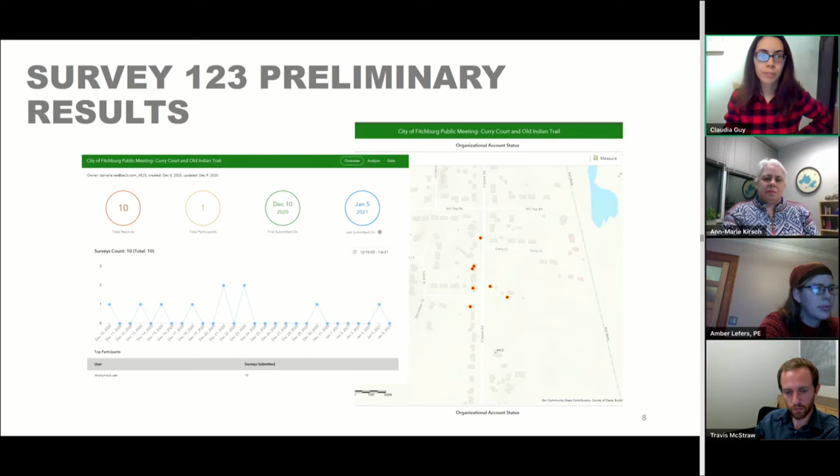So the project purpose and scope. As I'm sure everyone here is very well aware, the Curry Court and Old Indian Trail area has dealt with numerous stormwater issues for many years. And the purpose of this project is to assess the area shown below for potential stormwater improvements. So that area of interest outlined there is the scope of AE2S's study.

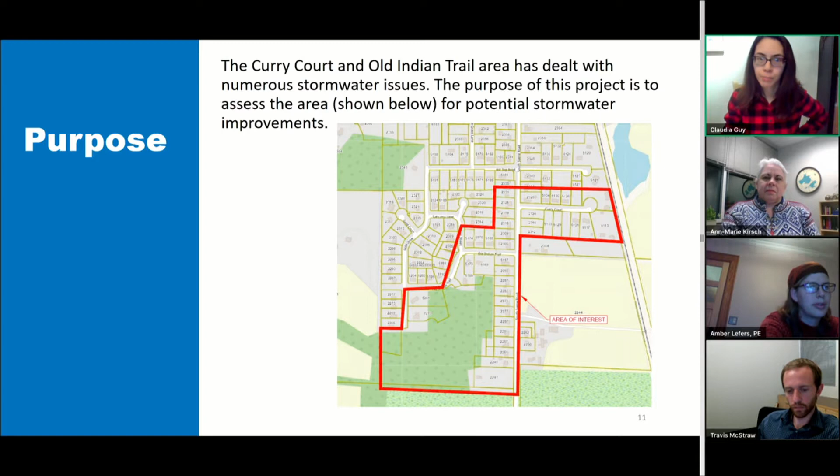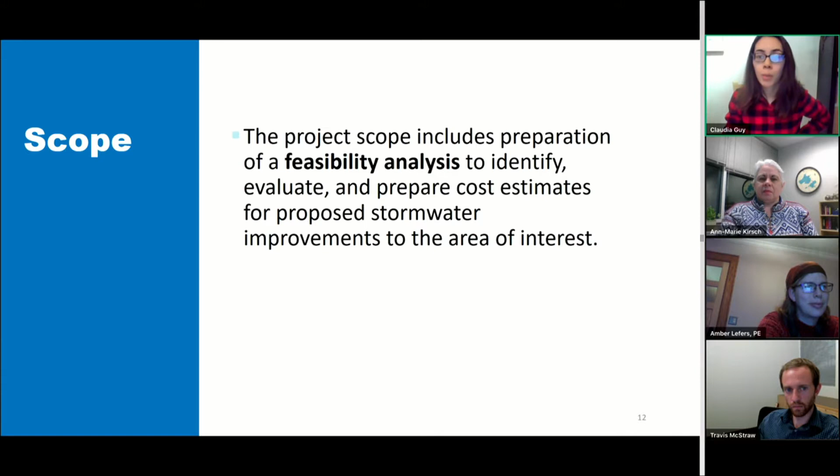More information about the scope. The project scope includes preparation of a feasibility analysis to identify, evaluate, and prepare cost estimates for proposed stormwater improvements to the area of interest. I did want to point out that the feasibility analysis is just that. It will be concept, solutions, and cost estimates. Actual preparation of construction plans for the selected alternative would be a separate project after this project is completed.

Going over some stormwater issues facing the neighborhood. One issue that we've seen and heard a lot of is slow moving water and stagnating water in ditches. This photo here is a photo of the culvert where it comes out on the south side of Old Indian Trail. As you can see, there's just a standing pool of water there, which doesn't drain, which means that water will pool there until it either infiltrates or evaporates, which means that water can stand there for very long periods of time.

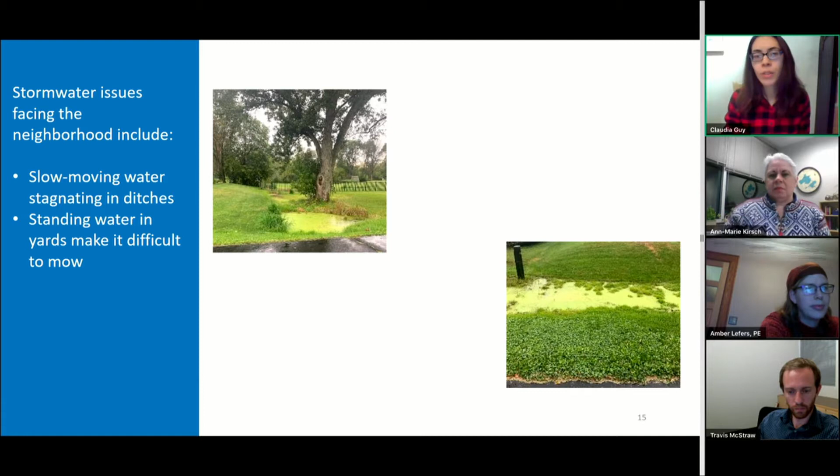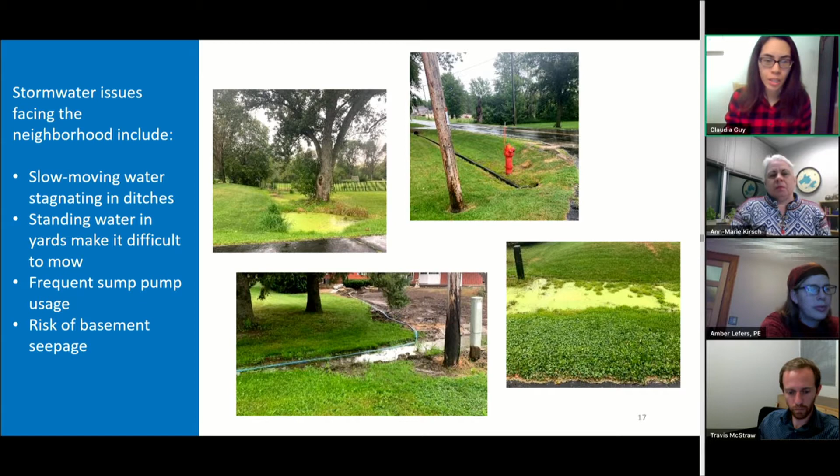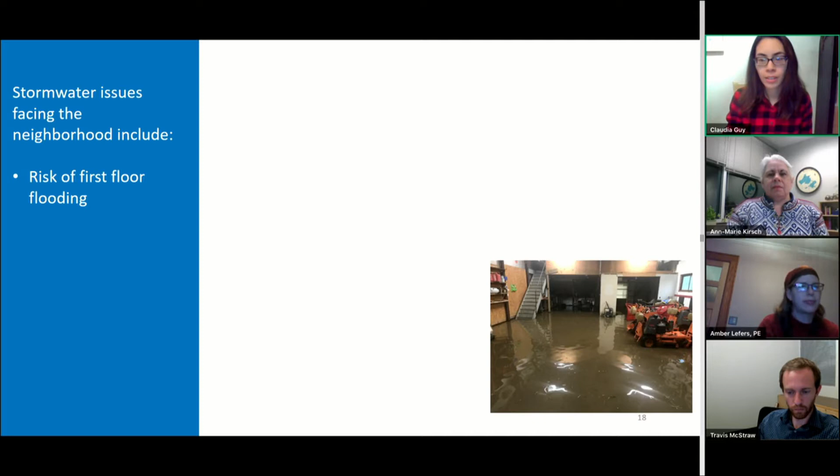Standing water in yards, which is both unsightly and makes it difficult to mow. Frequent sump pump usage, risk of basement seepage, groundwater getting into the basement, risk of first floor flooding. We have had reports of that happening to a few structures on Curry Court. This image here is a shed at the end of Curry Court, and you can see that there is water within that structure. Risk of basement flooding, and then also street flooding.

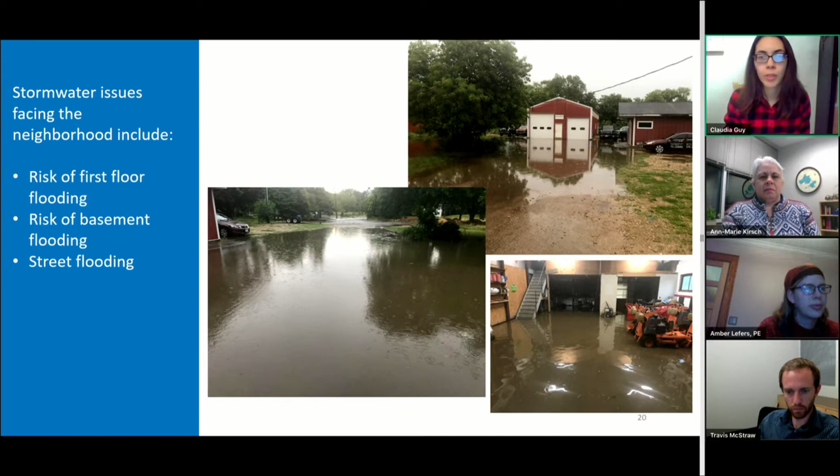Okay. Make sure I have my screen set up. Yep. Are we seeing the correct screen? Yep. Okay, perfect. Just wanted to check.

Okay, so talking about some of the existing drainage challenges. It kind of illustrates where the problems might be coming from and where we need to get to, and informs our decision-making process as we go through the alternatives analysis. So in general, this area, the Curry Court, South Syene Road, Old Indian Trail, has two general outflow locations. The light blue is showing the general watershed. That's about 64 acres that flows northwards to Swan Creek after it passes under the railroad.

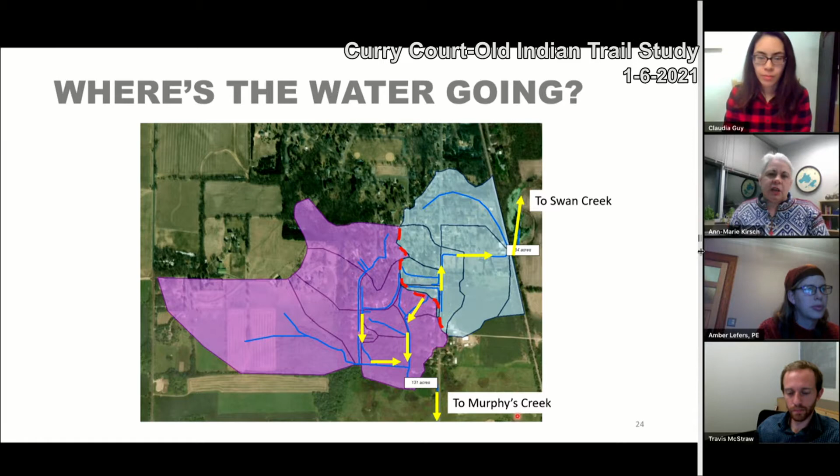In the magenta color on the left, this area eventually drains south through the Gold's Addition Park down south to Murphy's Creek, and then eventually flows east. Both Swan Creek and Murphy's Creek ultimately discharge into the West Waubesa wetlands and Lake Waubesa.

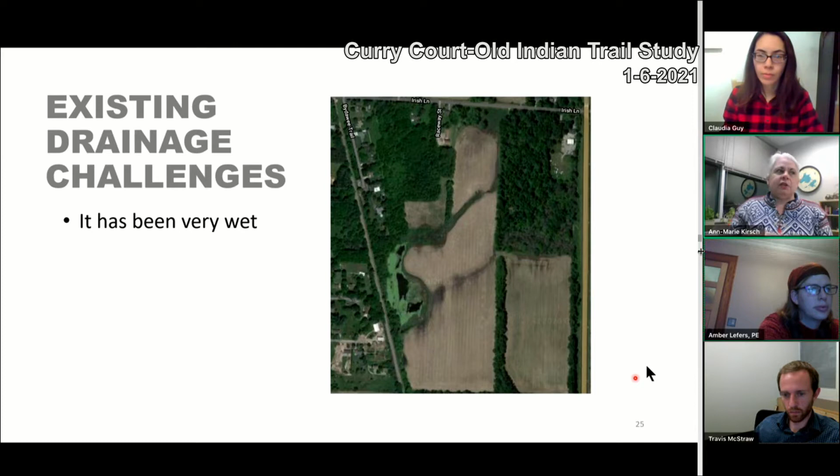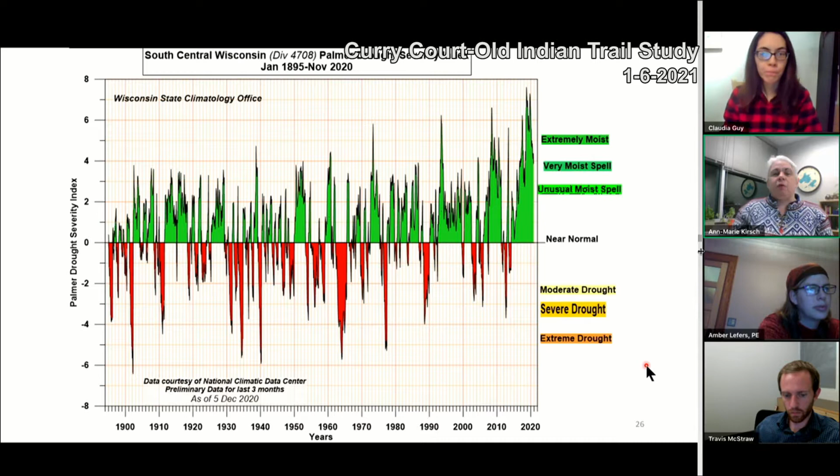Next, I'm going to show this graph. This shows generally over the last 100+ years, going back to 1895, whether South Central Wisconsin has been wet or dry. How far red goes shows how big the drought is, and how far green goes shows how relatively wet it is for that year.

Going through history, you see it bouncing back and forth, and you'll have longer periods of drought, like here in the mid 60s. But since the mid 60s, you can see that the green far outweighs the red. So on balance, since the mid 1960s, this area of Wisconsin has been far wetter than it has been drier.

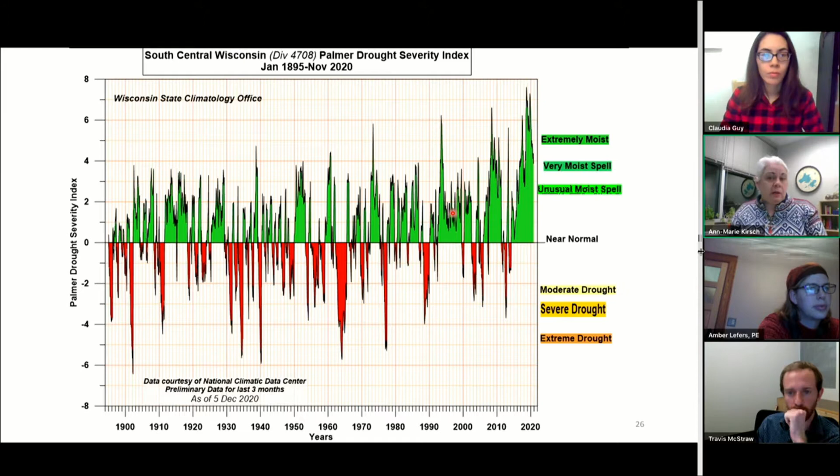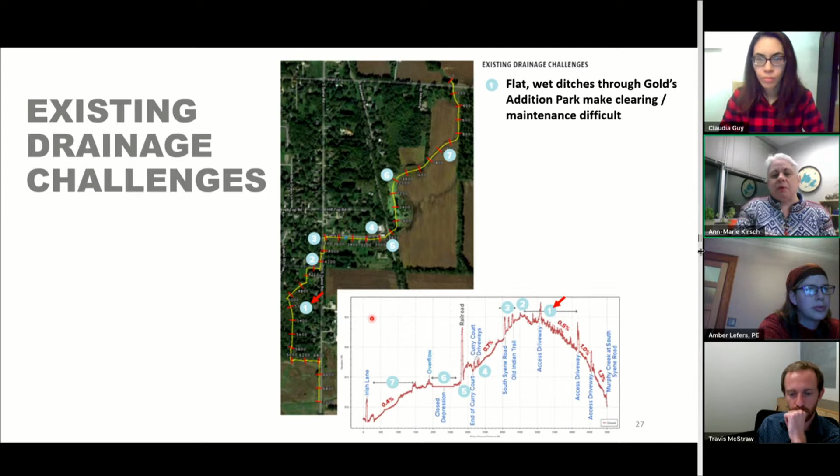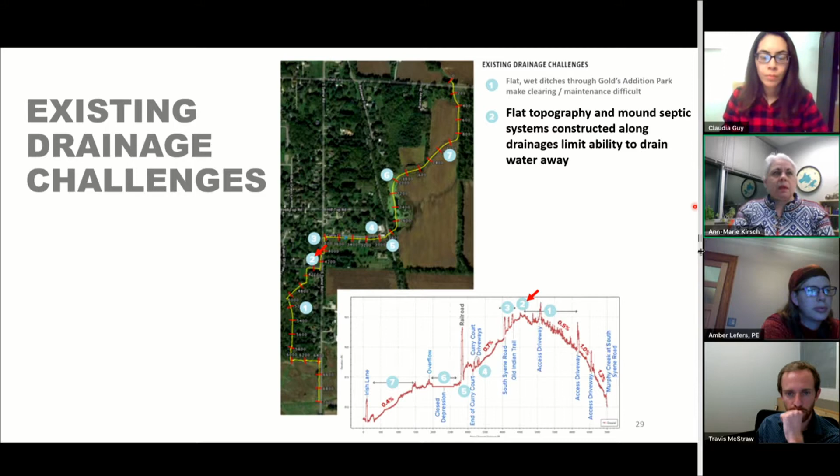And this image right here is showing a profile. If you're looking at this ditch more or less sideways, and you're looking from this direction, you see this localized high point that is at about 925 feet. So water gets kind of stuck there. It can't go south and it can't move north. This is the natural high point.

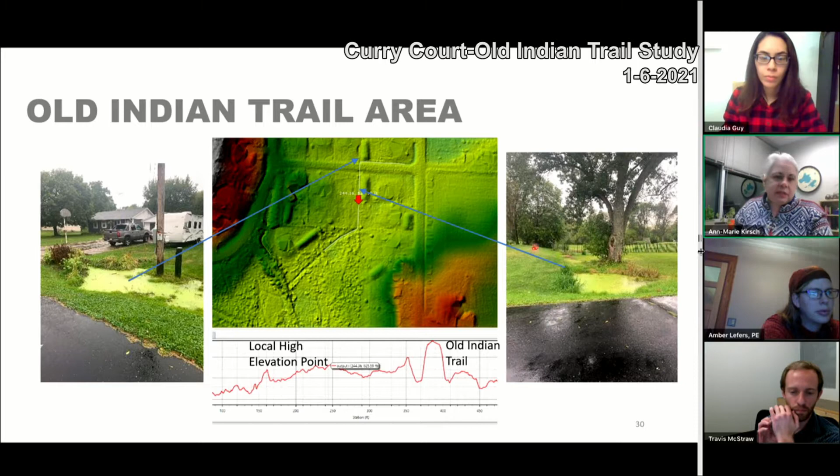And again, this is the culvert looking north of Old Indian Trail. And this area is looking south, as Claudia indicated before, with the mound system on your left as you look south.

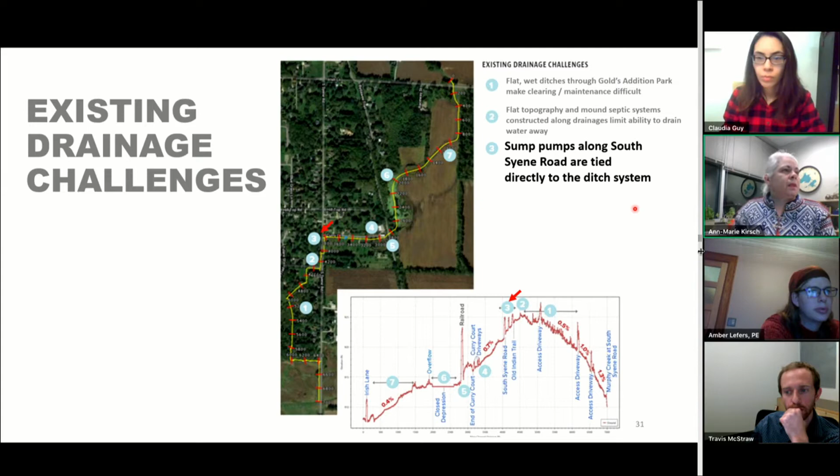Third, as we walk again along our drainage path, we've got this area where we've got some pumps along South Syene Road that are tied directly into the ditch system. So this is privately maintained, and it is available for the private residents along South Syene Road to tap into. And it drains north towards Curry Court. We'll get to that spot next.

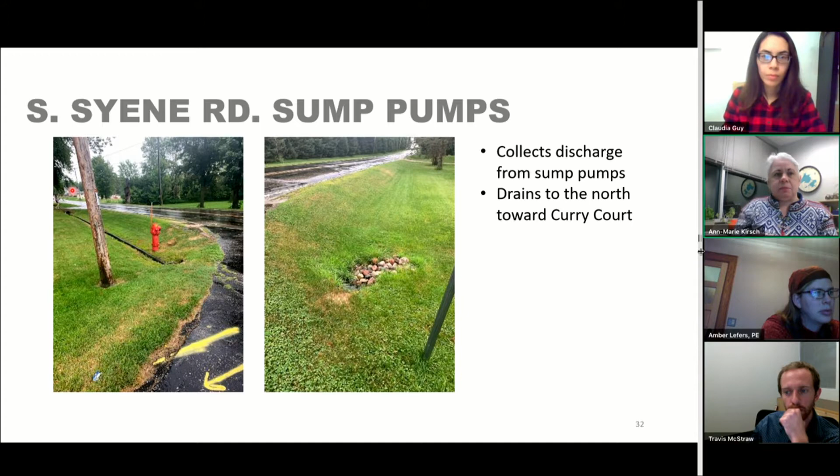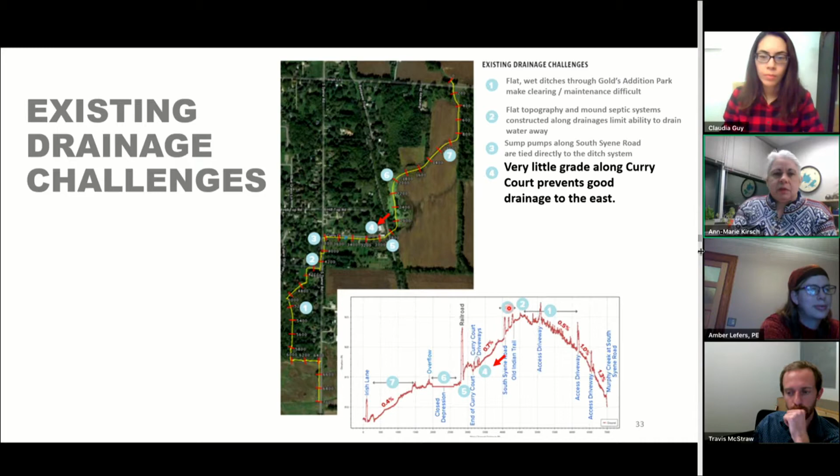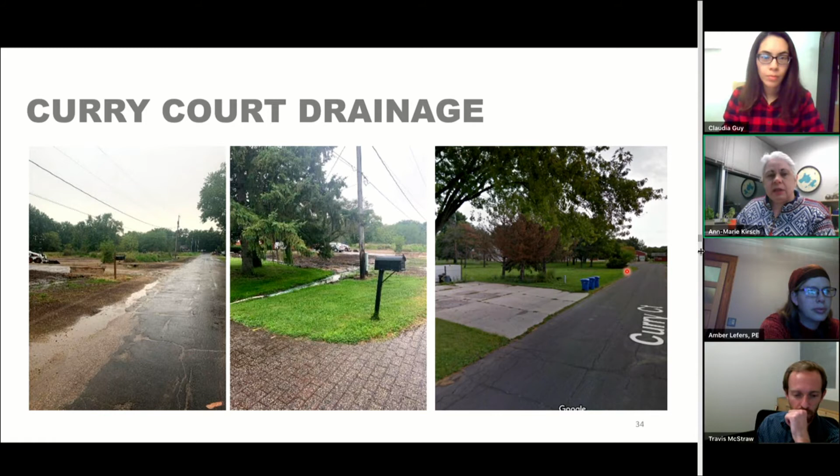So it drains to the east, and as you can see here, we've got no defined ditch on the north side of the road. And again, this is looking towards the east. And we've got a ditch on the south side of the road, culverts under driveways, some grading work being done by the homeowner.

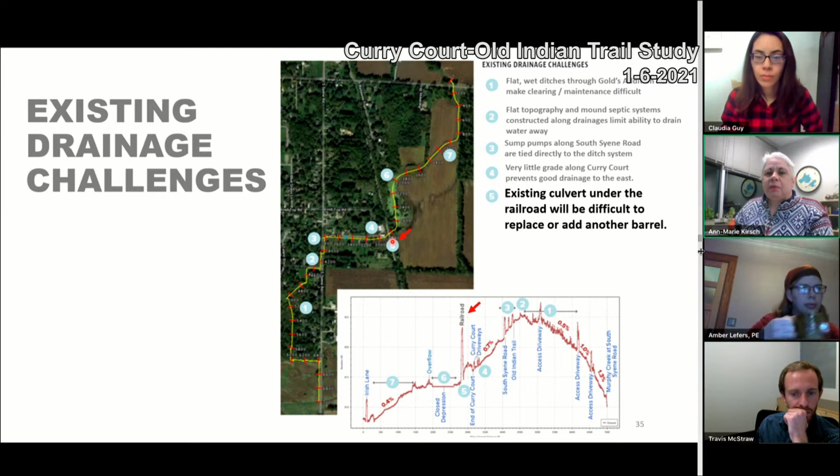Finally, number 5. So there's an existing culvert under the railroad. It's a stone constructed box culvert, and it's owned by the railroad. And because of that, it makes it very difficult to alter the drainage under the railroad. This was originally constructed with the railroad. It's owned by the Railroad Transit Commission of Wisconsin.

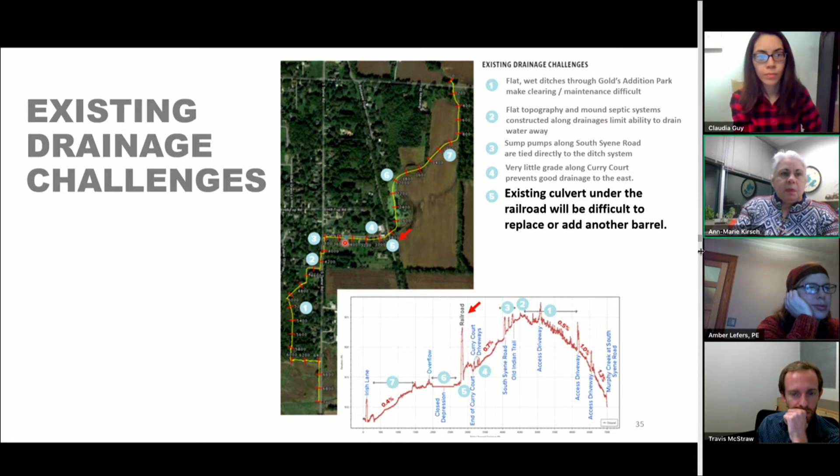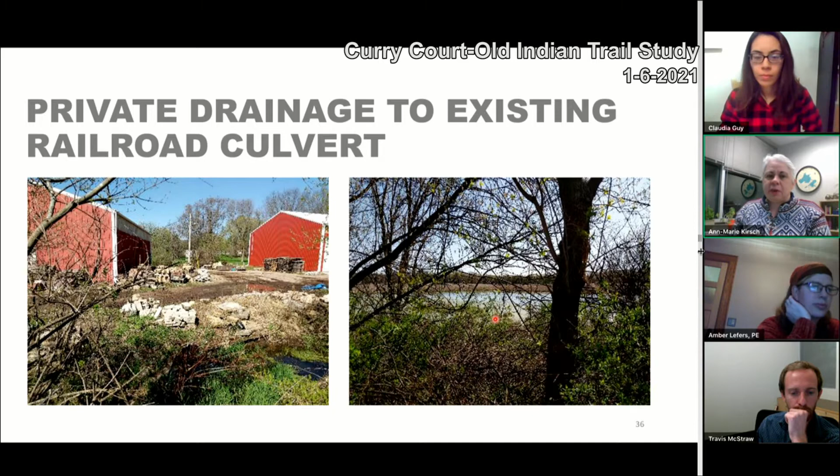Here's some photos. There's also private drainage going to the existing railroad culvert. And so this is going at the very far east end of Curry Court. And the second picture is a photo taken from the railroad crossing into that internally drained kind of kettle area left by the glaciers to the east of the railroad.

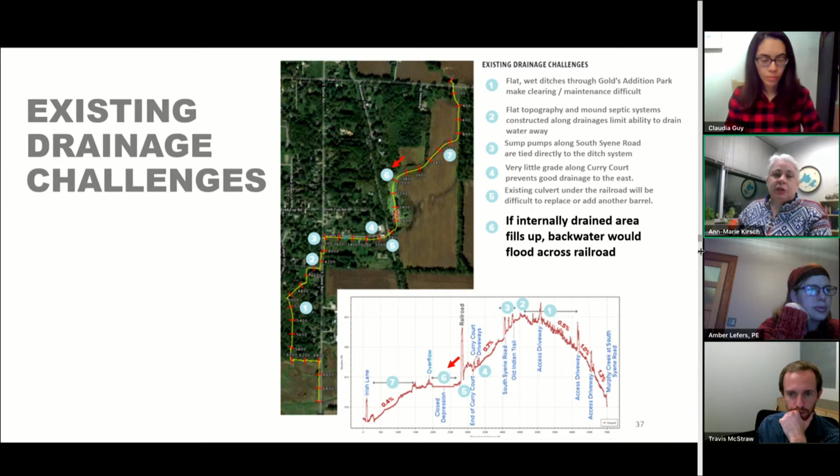And that brings us to this area number 6. So this area is an internally drained area, and it can fill up and it can actually back water up to the railroad culvert and possibly beyond into Curry Court. Now, these internally drained areas, they're little kettles that were left by the glaciers in the last ice age.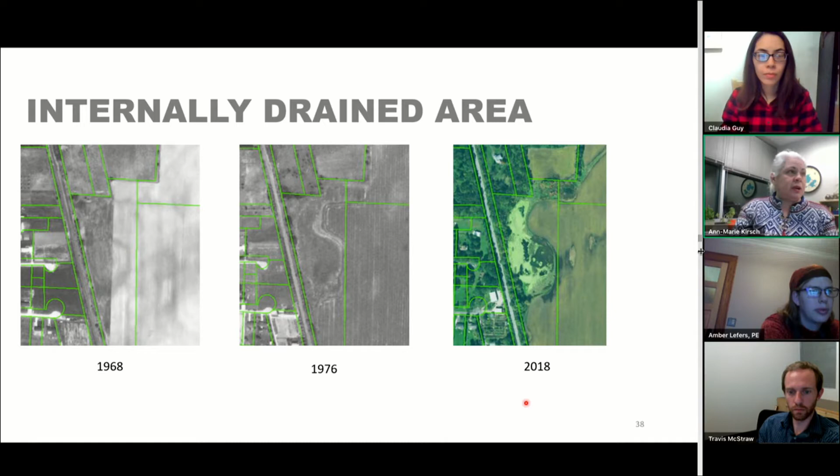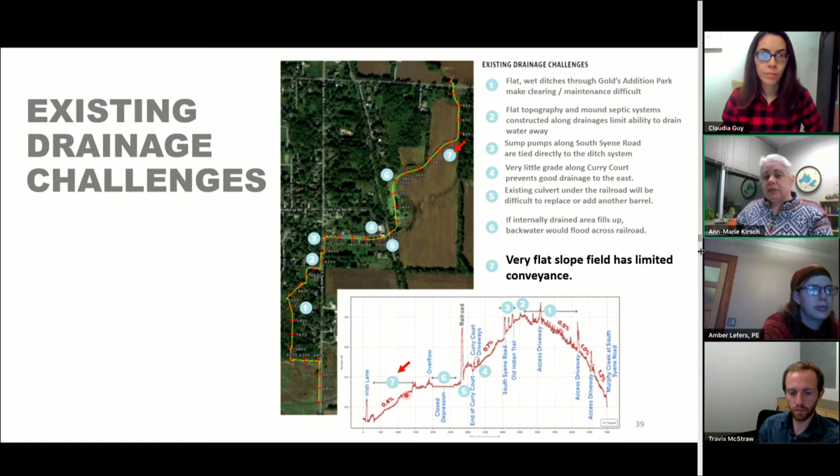And then finally, the last section of our drainage way going north to Swan Creek is very flat, and it has very limited conveyance. And as we look here on the profile, again, going from the depressional area here to Irish Lane, we only have a slope of about 0.4%. So again, just a few inches over 100 feet in terms of positive drainage.

So we looked again at some historic aerial photos to see if there was any indication of previous ditching. And this is looking again at the current drainage path, and this is based on contours and LiDAR data. And when you go back to look even to 1955, there's not really a ditch that's been dug like you've seen in some drainage districts to help drain the land, nor in 2010. There's just a little bit of, like we talked about, indication that there's a wet area through the middle of the field.

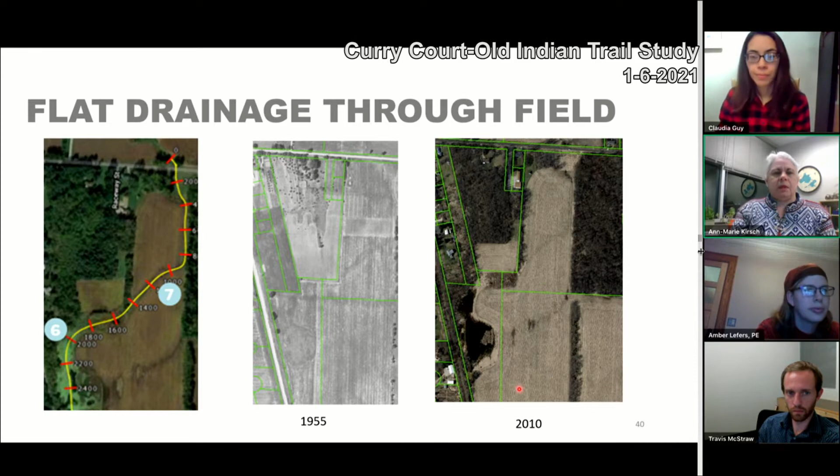So now that we've talked a little bit about what the existing concerns are, we're going to talk about what are some of the things that we may look at as potential improvements. Now, like Claudia mentioned earlier in the presentation, we're really looking for input from you. I know a lot of the residents have reached out to Claudia in the past about what some of the issues are, and we really wanted to get a full comprehensive view of the residents' thoughts on problems and ideas for potential solutions.

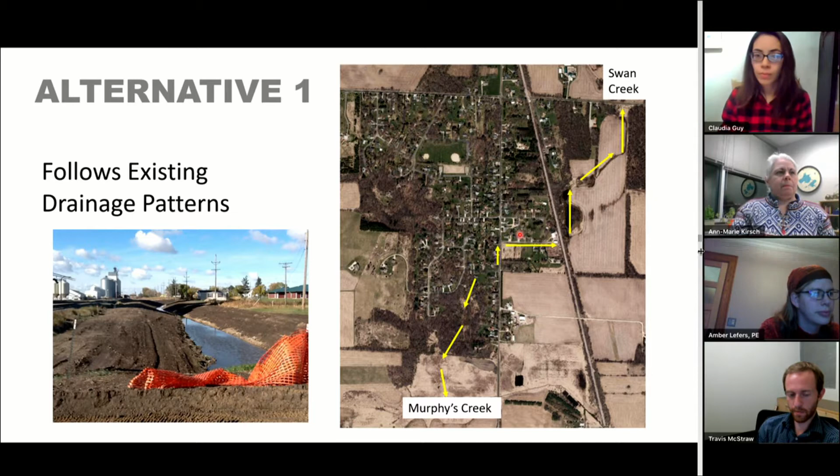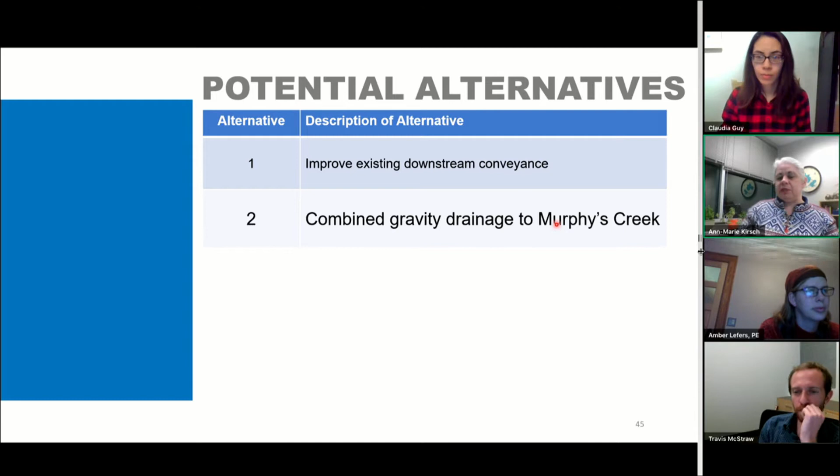The second option would be, well, is there a way to combine the runoff, the water that flows through both of these areas south, and use gravity drainage to Murphy's Creek? What this means is, again, can we use just conveyance through open channels and pipes to get the water to flow to the south? So again, that could include channelization. That might involve working with the city. There are a few parcels here at the corner of South Syene Road and Curry Court that are currently owned by the city, and use that as a centralized collection area and route the flow potentially along the railroad south to Murphy's Creek.

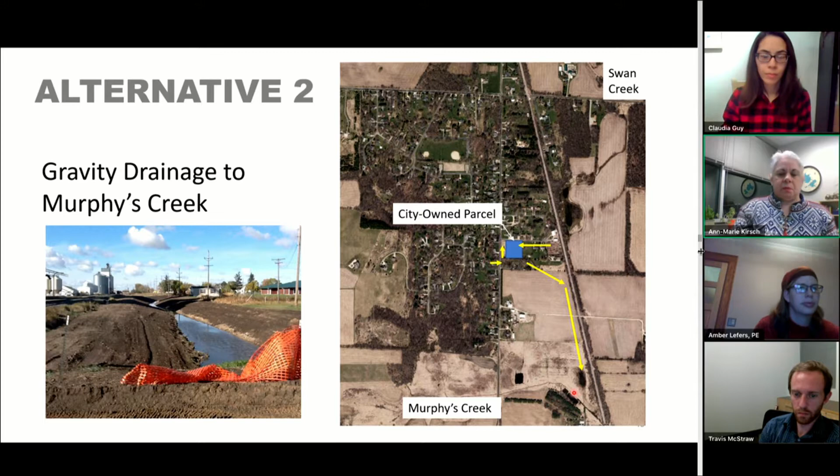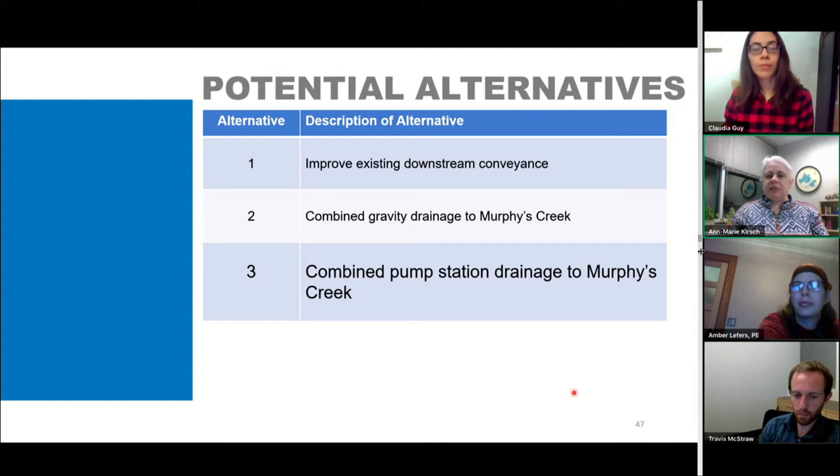So again, a third alternative would be, well, what if we combined all the drainage and used the pump station and drained south to Murphy's Creek? What might that look like? What that might look like is building of a pump station, either a submersible or non-submersible pump station, again, on the city-owned parcel, collect the water, regrade from Curry Court to make the water drain towards this area, bring the water from the south, and then use a pump station to pump it through a pipe up to the high point of South Syene Road, and then allow it to flow through gravity the rest of the way to Murphy's Creek.

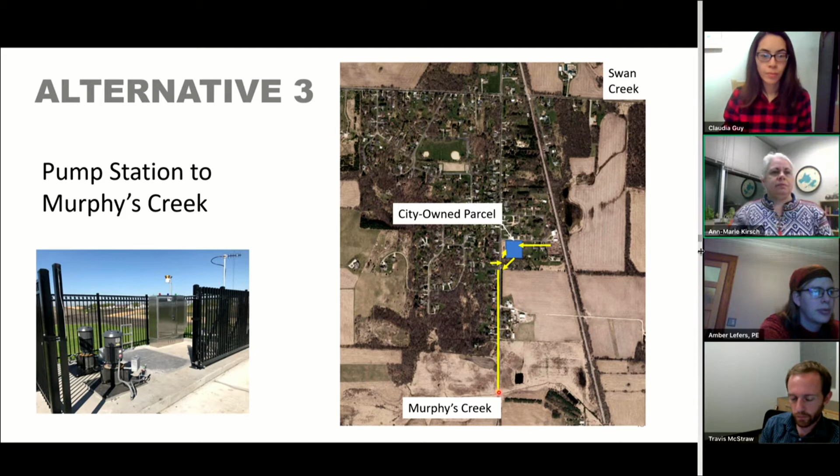And then similarly to alternatives 2 and 3, we would be looking at for 4, combined gravity drainage north to Swan Creek as an outfall. Again, that might involve some ditching, some culvert improvements, combining that flow as much as possible, at least from the Old Indian Trail area, to a combined system, then east along Curry Court, and looking to see if there is the potential for improvements under the railroad and through the internally drained area, and then north to Swan Creek.

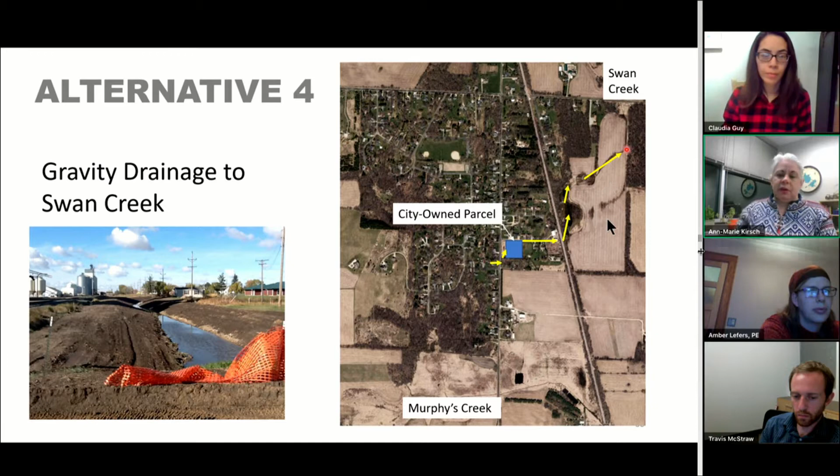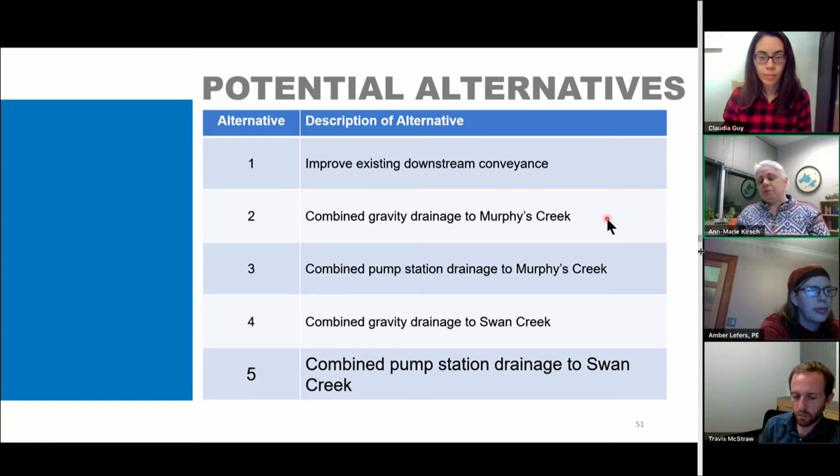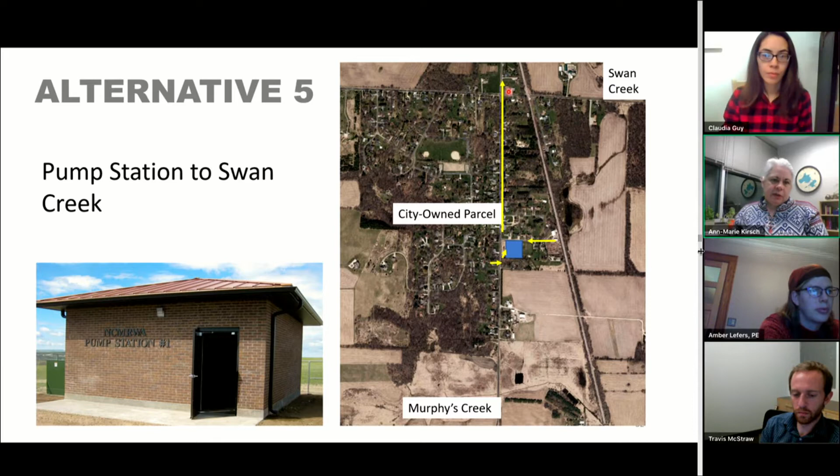And finally, the 5th alternative that's currently under consideration is combining the drainage to a pump station facility and pumping it north to Swan Creek. And again, we have our city-owned parcel at the corner of South Syene and Curry Court. And in this case, we'd be looking at collecting the water from Old Indian Trail and Curry Court, and then forcing it using a pump station to the high point along South Syene Road, and then allowing it to flow by gravity downhill until it intersects with a tributary to Swan Creek. Now, again, of these 5 alternatives, the city will work to select 3 alternatives for further evaluation.

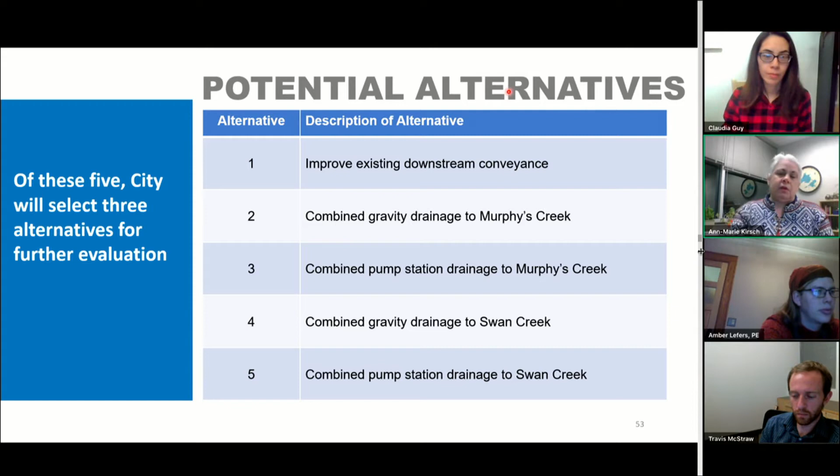And like any potential improvement, projects have benefits, but there are also drawbacks. There is no silver bullet for this area. You know, if it was easy and inexpensive, it would have already been done. So this is really looking at what's the best course in terms of maximizing benefits while minimizing the drawbacks. And what are those? Well, some of these drawbacks might be deal breakers.

When we talk about routing land across private property, that means we need to get permission from that property owner, either through an easement or through purchase of land. Other deal breakers may include permitting. Moving water runoff from one watershed to another may be a concern for regulatory agencies. There are wetlands in the area. So there are all of these other considerations that need to be considered.

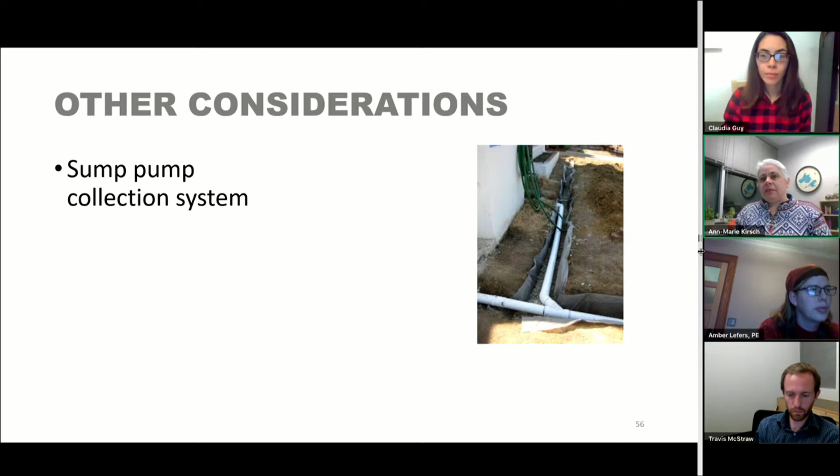So what are some other things that we might think about throwing into the mix in terms of solution alternatives? One might be a sump pump collection system. As we saw in the earlier slide, there is a system along South Syene Road. There are other systems in some communities that we work with where these are required as part of new development, where sump pumps are tied in to kind of a network and then flow to a centralized collection system that may or may not include a pump station.

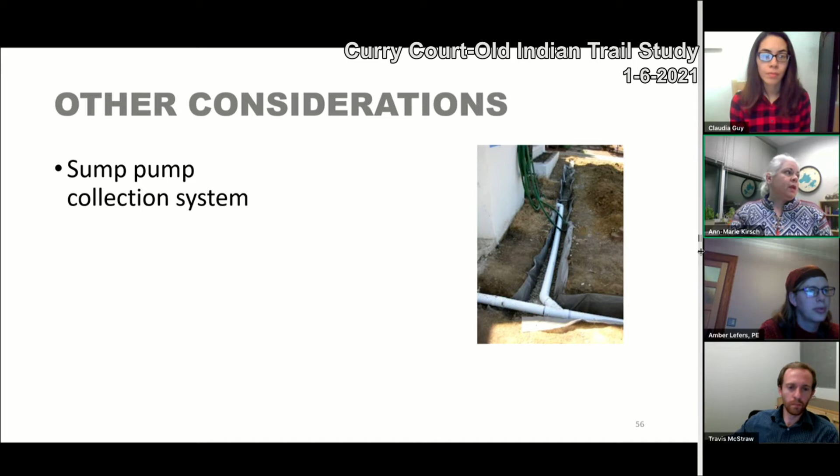Also, drain tiles. Is there a possibility to put additional drainage underground underneath the ditches through a tile system? A third option might be to look at more of an urban section with storm sewer, with inlets and catch basins, more like you would see in the central urbanized area of the city of Fitchburg.

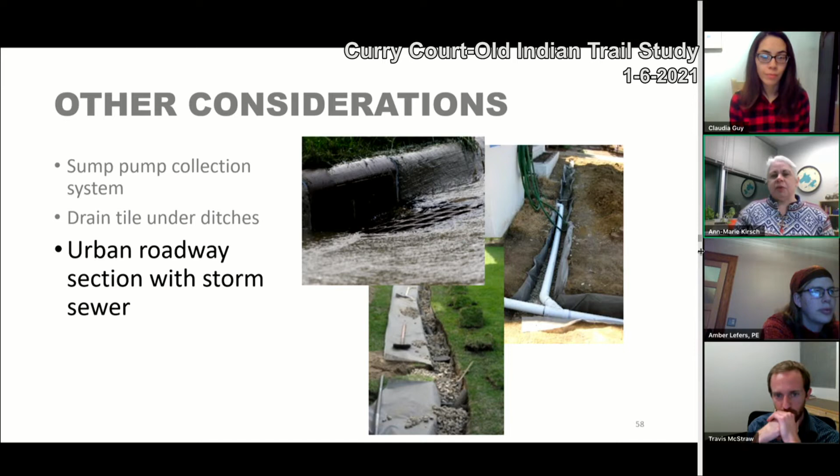And finally, I want to wrap this up by talking about what are our next steps as we go through this process. Next step is to be looking at completing the existing conditions analysis. Earlier, I showed really basic watersheds. So figuring out where the water is coming from, what is the intensity, what's the level of protection that we want to look at: 10-year event, 25-year event, 100-year events.

We also will work with the city to compile the survey 1, 2, 3 results and comments from the residents. We'll be meeting with Wisconsin DNR and Dane County to review potential permitting requirements. And like we talked about earlier, wetlands, water quality issues, and shoreline zoning may all come into play here. Once we have the existing conditions analysis and an understanding of permitting requirements, we'll look at the alternatives analysis, again selecting the 3 most promising of the 5 that we just talked about.

And once we have the alternatives analysis complete, we'll meet with the public again as part of public information meeting number 2. And then finally, we'll work with the city in terms of what's the best alternative to move forward in terms of taking the feasibility analysis and turning it into an actual project as part of the capital improvement program.

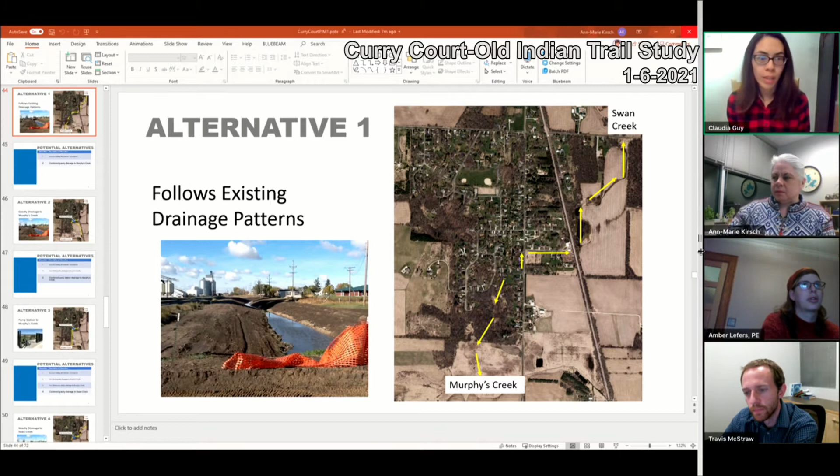All right. They can sign up for Notify Me for this project too, if they haven't? Yes, so that's a good point, thank you. So if you haven't signed up for Notify Me, and Anne-Marie, if you can show that last slide of the presentation again, if you go to the city's website, and actually Amber put it in the chat box there too, if you go to the city's website for this project, there's a link to Notify Me, which is basically a functionality that the city has.

You can sign up for various topics that you're interested in receiving notifications for. And there is one called Curry Court and Old Indian Trail Study, and you can sign up to get notifications about this particular project. And so I will be sending out notifications. I sent one out for this public information meeting. I'll send one out for the next public information meeting. I'll send them out whenever we're going to council. And so that would be the best way to get that information. All right.

Next question I see here is a suggestion to make the corner of Curry Court and Syene Road into an agricultural field. And Claudia, I think you know a little bit of history of those properties, and what the city wants to see from that. Yeah, so I can say it's currently park property, and I don't want to speak out of line here, but it's very, very wet, so it's not functioning as a park currently. And that's a decision outside of something I can say will or won't be done, but I would say it's not out of the question.

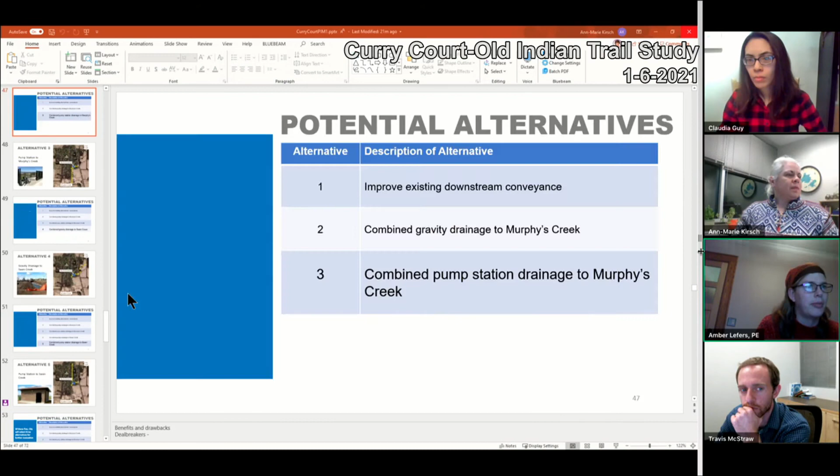Let's see here. I see another question here. The flow to the south through the park is not exactly where the yellow arrows are shown. Again, I'll note that they're very conceptual. But the question part of it is, will a survey be done to determine the exact path of the existing water flow? And yes, the city is providing surveying support.

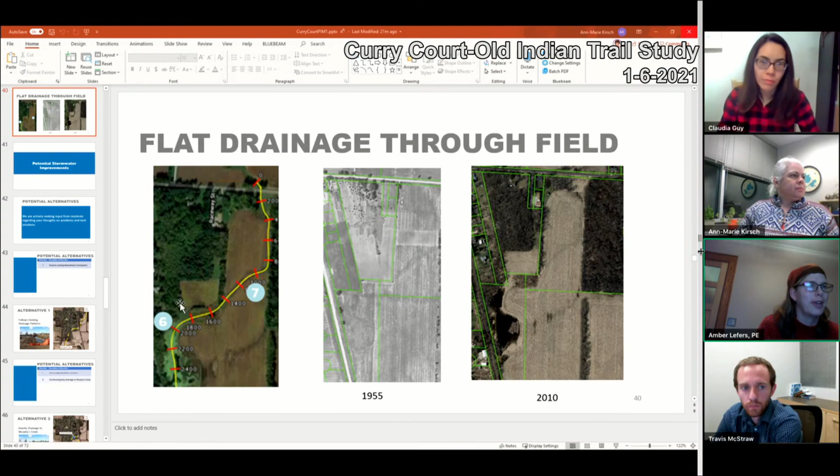We've got great LiDAR. Where LiDAR struggles is getting the bottom of wet ditches, but certainly survey is part of this, and the city's already done some survey as well. So to talk about what Amber said, this is a snapshot of LiDAR going through the park, so that we know that the ditch goes this way, it goes to the southwest. But like she said too, there's not as much detail once you get into a heavily wooded area or overgrown ditch.

All right. This is a question from another person. This kind of gets to the Syene Road construction project coming up. Will the current south tiles be adjusted or disrupted given the road construction that's coming up this year? I don't think I can answer that question at this moment. I can take that as a follow-up. All right.

Let's see here. Can we put a retention pond in the Curry Court land? And I'm assuming this would be the city property or the properties that would accommodate storm events. And I'll have Anne Marie take that question. So a detention pond may be part of the solution, but it's not going to be the only solution. And part of that problem is because that land is already really low, right? And so if you dig a hole, that hole is just going to fill up with water, especially when the groundwater is high.